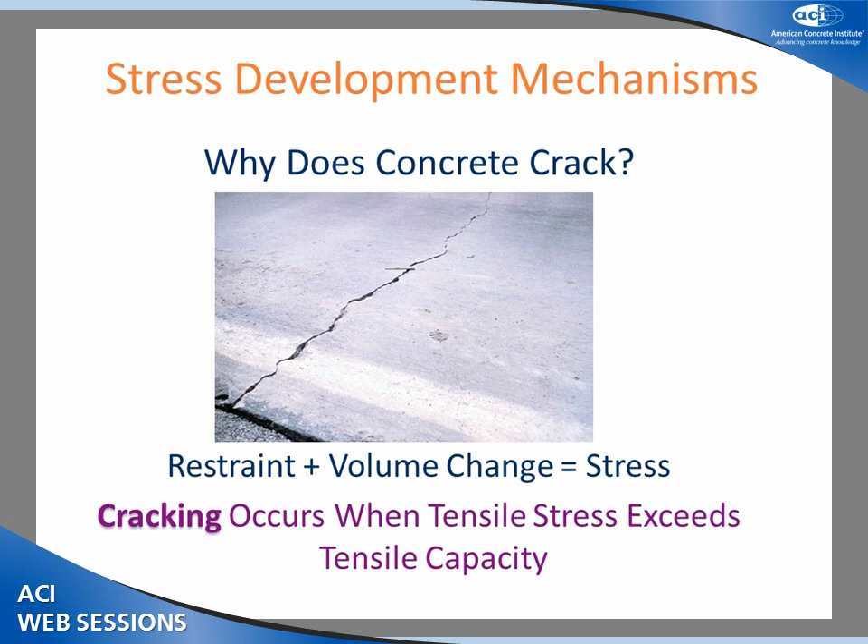Well, when you place concrete in a restrained condition, such as a bridge deck or a slab on grade, you get restraint from either the base, in the case of a slab, or a girder in the case of a bridge deck. So when you have that restraint and then you have these volume changes that occur naturally, you get stress development. When that tensile stress exceeds the tensile capacity, then you have cracking occur.

So why do we have early age volume changes? Well, it can happen for a couple of reasons. One is thermal effects - something changes temperature, it wants to expand. When it heats up, it wants to shrink when it cools down. At early ages, that's primarily going to be heat of hydration, and that's going to be a function of the coefficient of thermal expansion, so different concrete proportions are going to have different CTEs.

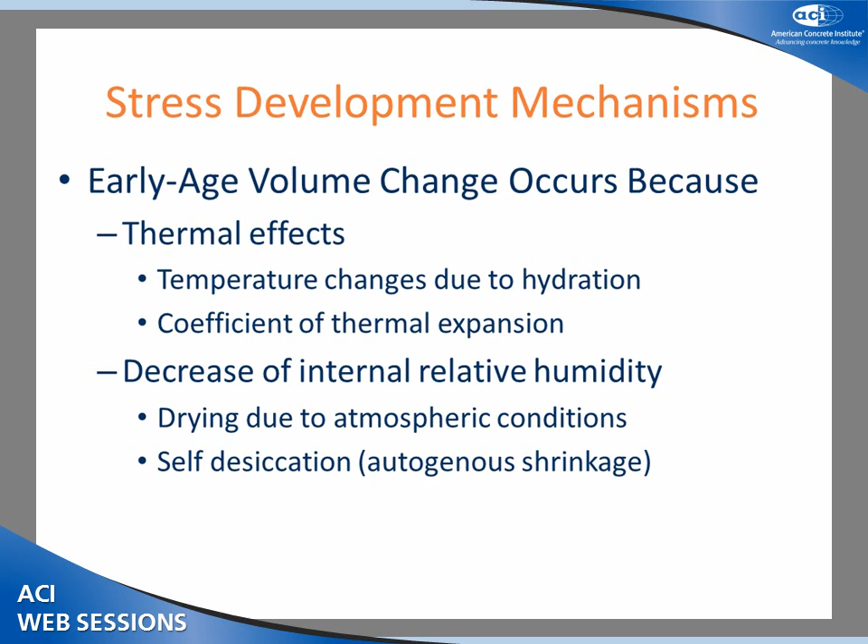In addition, you can also have a decrease of internal relative humidity. One of these we're real familiar with is drying shrinkage, which is moisture leaving the concrete, going into the atmosphere. But then you can also get decreased internal relative humidity due to self-desiccation, which is the consumption of water by the continuing cement hydration. And that's going to lead to autogenous shrinkage, or one of the reasons why we get autogenous shrinkage.

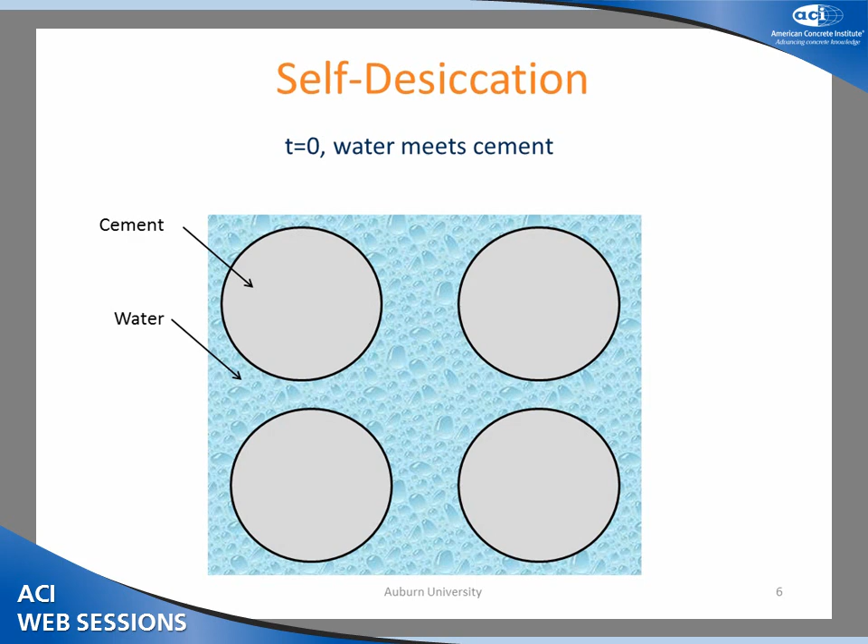So a closer examination of self-desiccation here. Here's a simplified cement water model - you have your cement, perfectly spherical cement grains, which isn't possible, but it makes a pretty picture. So we have our cement and water. This is T equals 0, cement meets water. And we jump forward in time to initial set. At initial set, we have hydration products that are bumped into one another now - you're starting to get a rigid skeleton forming.

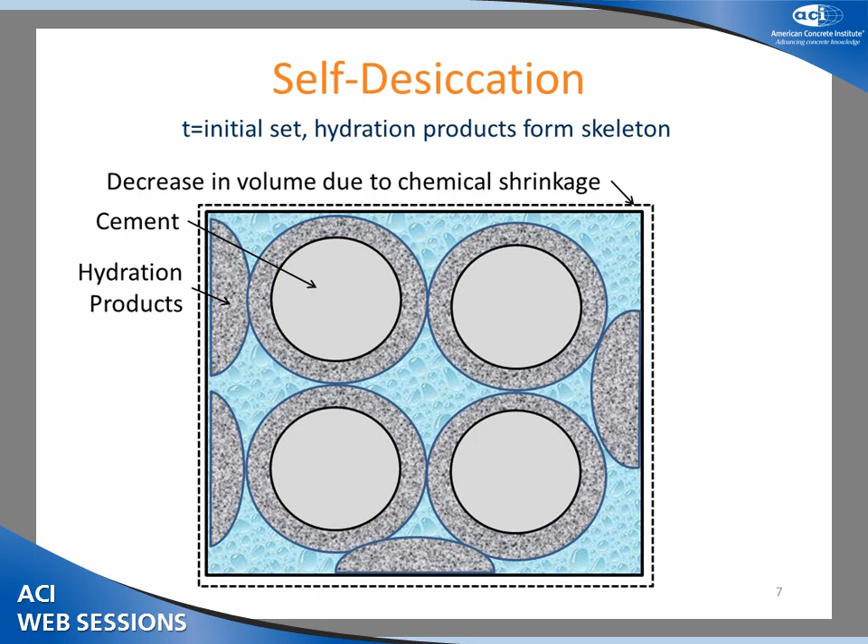Since we have chemical shrinkage, which is about 7%, the hydration products are smaller than the initial grain of cement, and so you get a decrease in volume due to this chemical shrinkage. This is imperceptible before set because there's no stress—these are just cement particles floating around in solution, so there's no stress generation because there's no rigid skeleton yet. What you get is just an imperceptible, almost settling of the slab, and nobody really cares about this shrinkage.

But what we start to care about is later in the cement hydration, a good time after set, we have a lot of hydration products bumping into one another. We continue to have this chemical shrinkage, but since we have this rigid skeleton, we can't just settle a little bit. So what we get is the formation of capillary pores, and this chemical shrinkage causes these vapor-filled pores.

As the cement continues to hydrate, it starts consuming this water out of these pores. So you get a similar effect to drying shrinkage, except with drying shrinkage the water goes into the atmosphere—now it's being consumed by the cement, so this happens in a completely sealed system. We're going to have an additional decrease in volume due to capillary stress. These pores are drying out, we get capillary stresses, and we get this additional shrinkage due to capillary wall stresses.

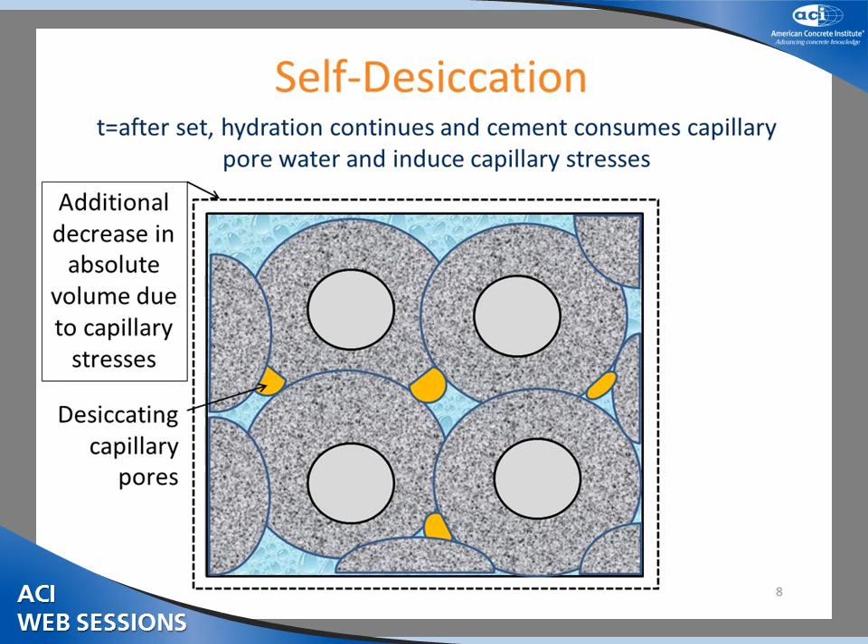Now, with the introduction of some internal curing media—in this case a pre-wetted lightweight aggregate—you get moisture movement from the lightweight aggregate into the hydrating cement paste. This prevents or reduces these capillary stresses by keeping those capillaries full of water or vapor, and so the shrinkage is reduced by limiting these capillary stresses. We found that water can move about 0.12 inches.

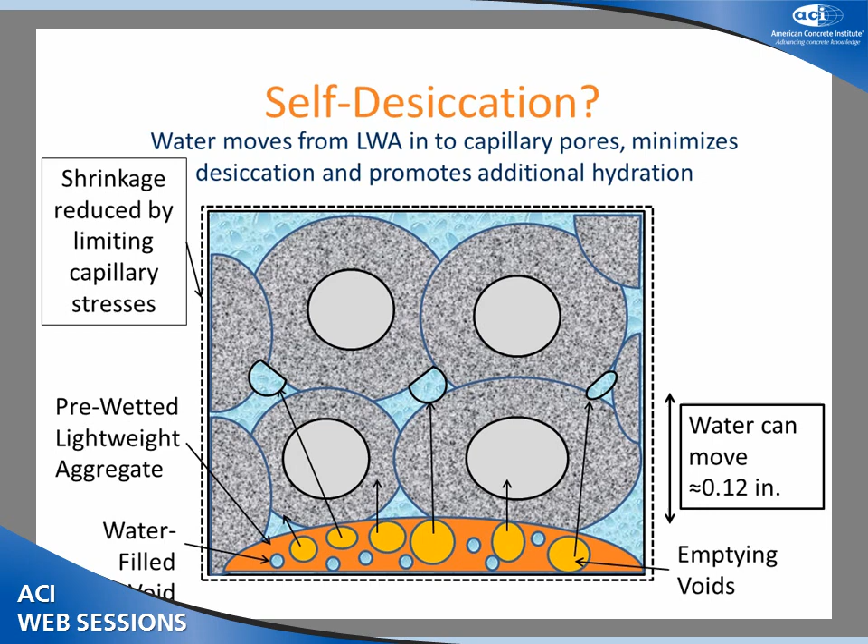In addition to this reduction in capillary stress, we're also keeping these cement grains moist, and by doing so we're increasing their degree of hydration, because when you get pockets of desiccation around the cement grain, it doesn't hydrate as well. So by keeping a good high internal relative humidity, you get a higher degree of hydration.

So why use lightweight aggregate? When you batch it in the pre-wetted state, lightweight aggregate has all this internal water, and this internal water promotes additional hydration, more internal curing. These saturated or pre-wetted lightweight aggregates may alleviate some of these capillary stresses, reducing autogenous shrinkage by keeping those capillaries full of water.

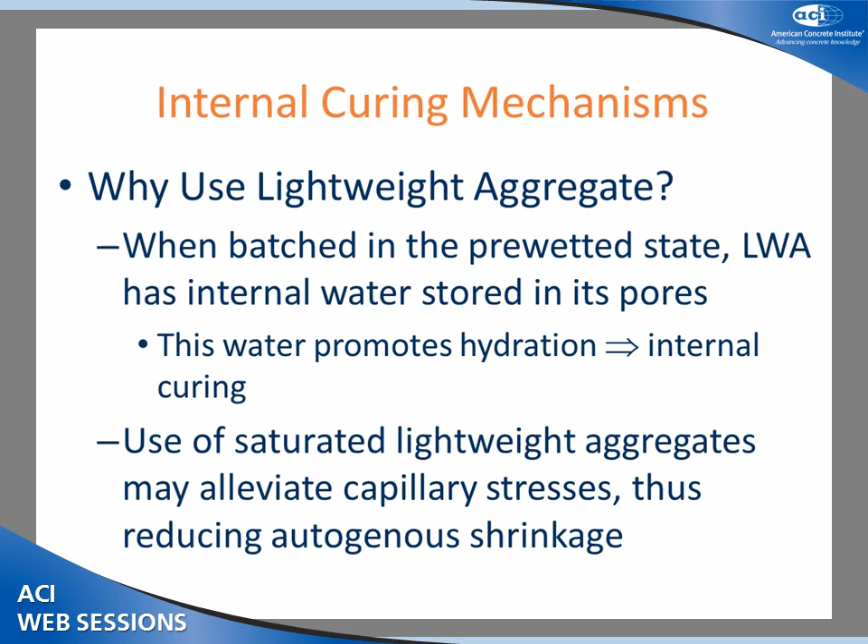Let's look at the testing equipment. We measured the stress development using our rigid cracking frame. Essentially you have this large concrete dog bone—its cross-section is 6 by 6. If you stand that puppy up, it stands about as tall as me, so about 6 foot tall, with dog bone gauge length and everything.

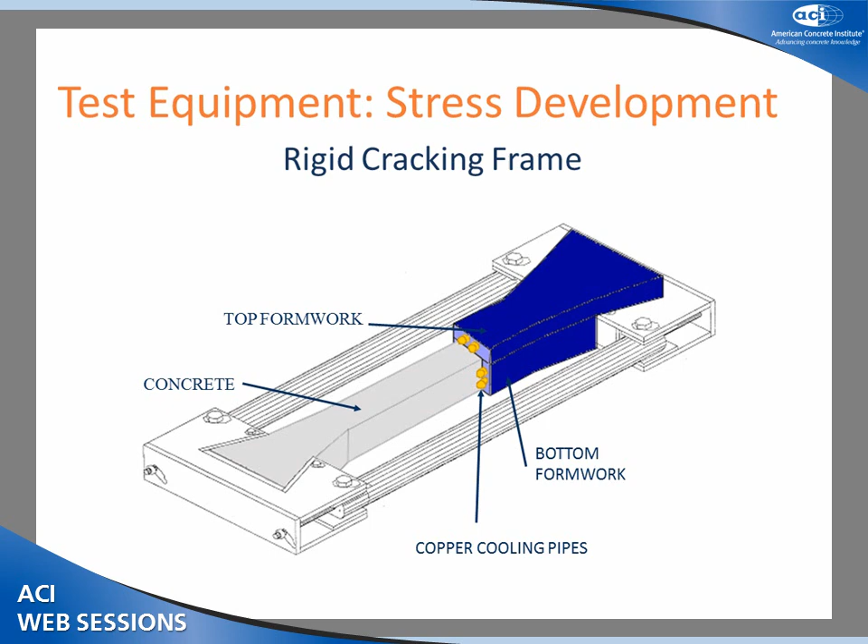So we cast it in sealed formwork, and inside that formwork we have copper cooling pipes—you can see it there. You have some copper cooling pipes, and that allows us to control the temperature of the sample, so we can run it through whatever temperature regime we'd like. As it undergoes these volume changes, it's restrained by those large 4-inch diameter steel bars.

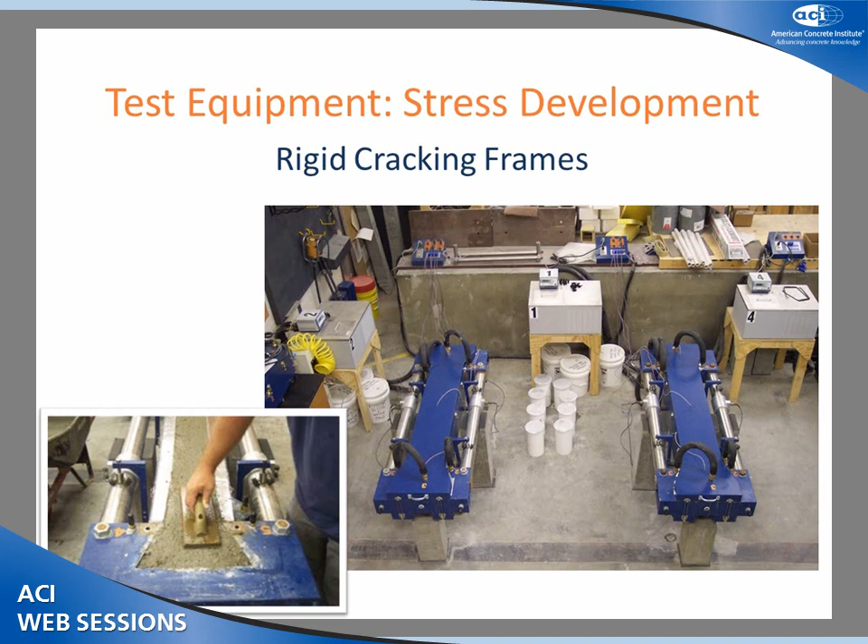And so here they are in real life. You can see the hoses there that circulate our temperature control fluid, which is water and ethylene glycol. You can see somebody finishing it there. Like I said before, it's perfectly sealed, so there's no moisture movement in this system, and then we can control its temperature with those large temperature control baths. That's how we measure the stress development in these rigid cracking frames.

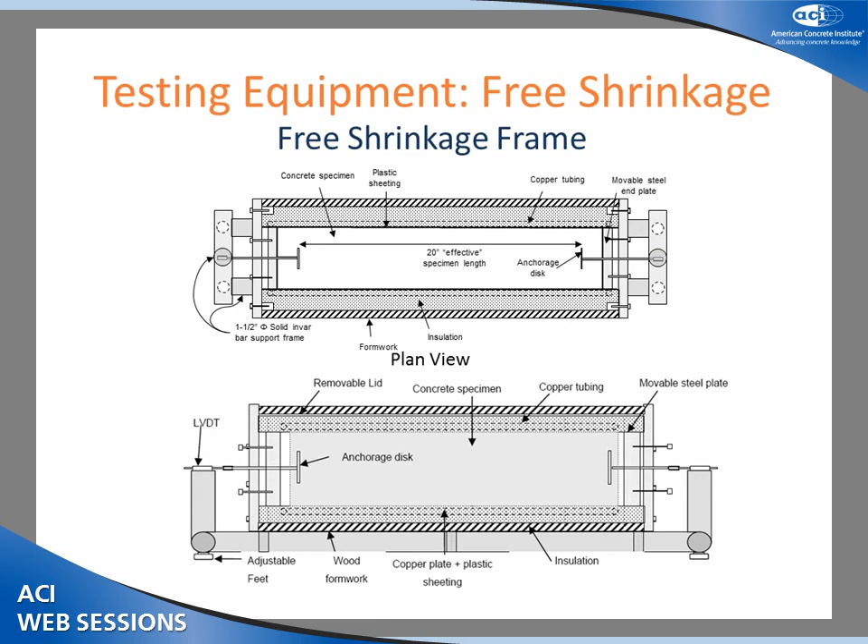To measure free shrinkage in concrete, we used free shrinkage frames developed by Byard. We borrowed his design and built them at Auburn. We have a 6 by 6 cross-section box, place 2 layers of plastic with oil in between, place the concrete, attach LVDTs embedded into the sample, then cover and seal it.

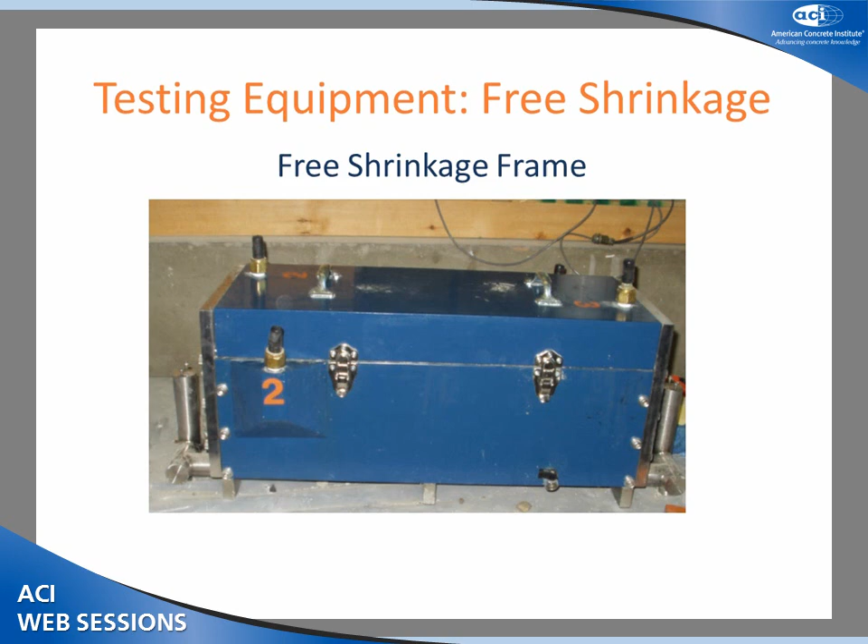It's also temperature controlled, so we can run it at the same temperature regime as the rigid cracking frame for stress development. This allows us to get the stress development and the unrestrained movement of the sample.

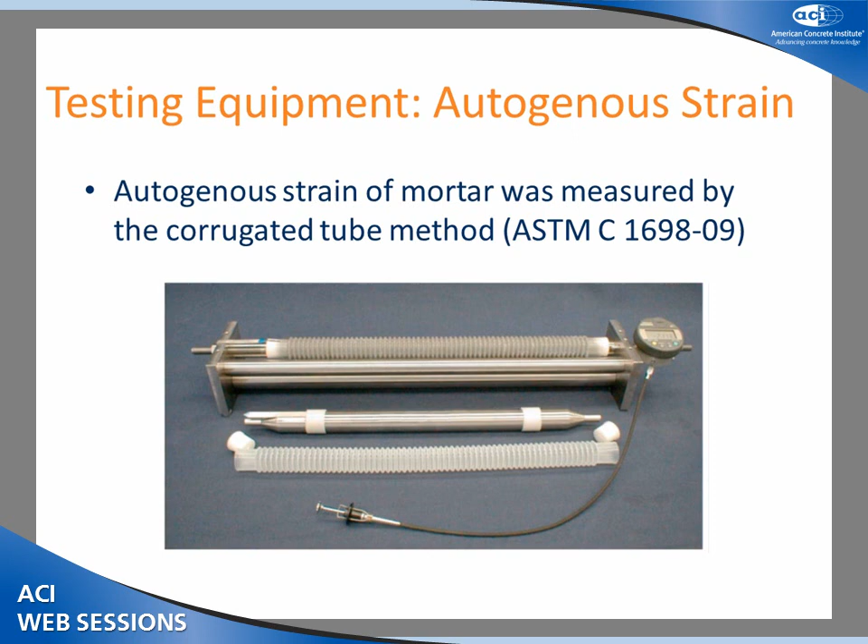For the free strain of the mortar, we measure that with the corrugated tube method, ASTM C1698. That's how we captured the free strain of the mortar.

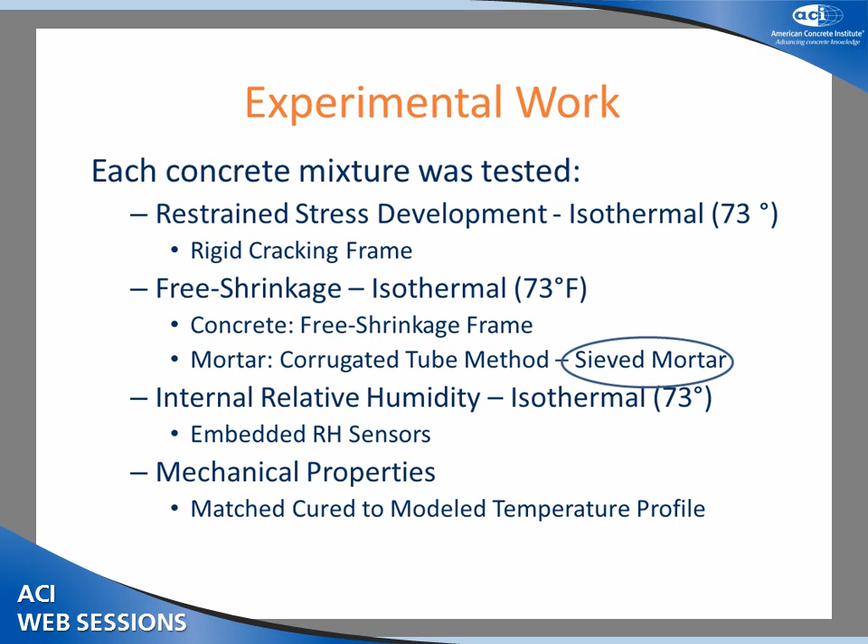We just sieved it, and we measured internal relative humidity with embedded relative humidity sensors, also held at isothermal condition. We measured mechanical properties too, but I won't present that data since there's simply not enough time in this 20-minute presentation.

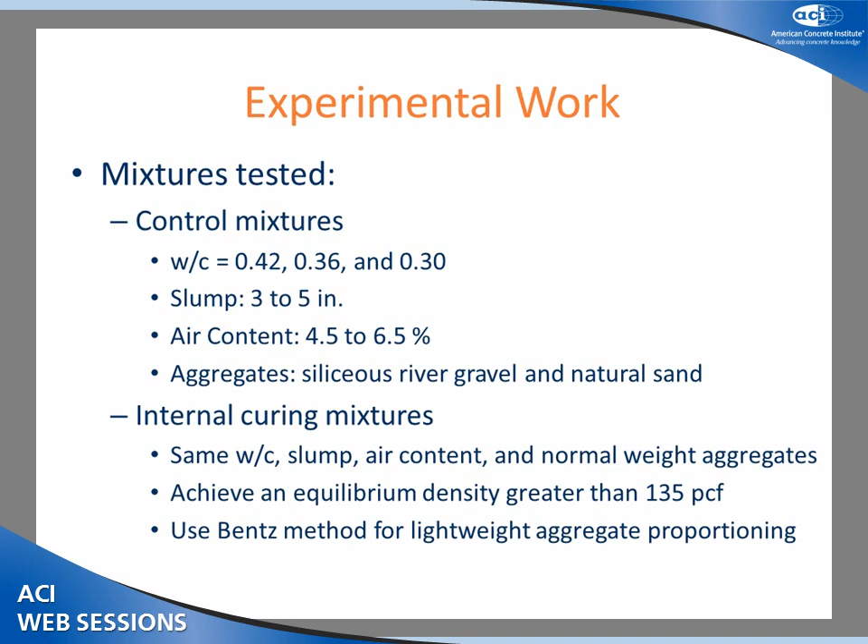The Bentz method simply calculates the chemical shrinkage volume and then supplies an equal volume of internal curing water. For our 0.42 mixtures, because of their proportions, if we used the Bentz method we would be less than 135 pounds per cubic foot. So for the 0.42 mixture, we simply used the maximum replacement of fine aggregate with lightweight aggregate that would give us a calculated equilibrium density of 135 pounds per cubic foot.

This did something interesting: the 3 lightweight aggregate sources we used—shale, clay, and slate—each had different absorption capacities and specific gravities, yet they all weighed 135 pounds per cubic foot calculated equilibrium density. Due to their different absorption capacities, they provided 3 levels of internal curing.

Shale, clay, and slate: the shale provided the most internal curing water, the slate provided the lower level. You can see our internal curing water provided from each of them, in pounds per cubic yard. Something else to point out: with all these mixtures, the paste volume was the same, the coarse aggregate volume was the same, and the total fine aggregate volume was the same. So fractionally, all these mixtures are the same—we just switched out a little normal weight with a little lightweight.

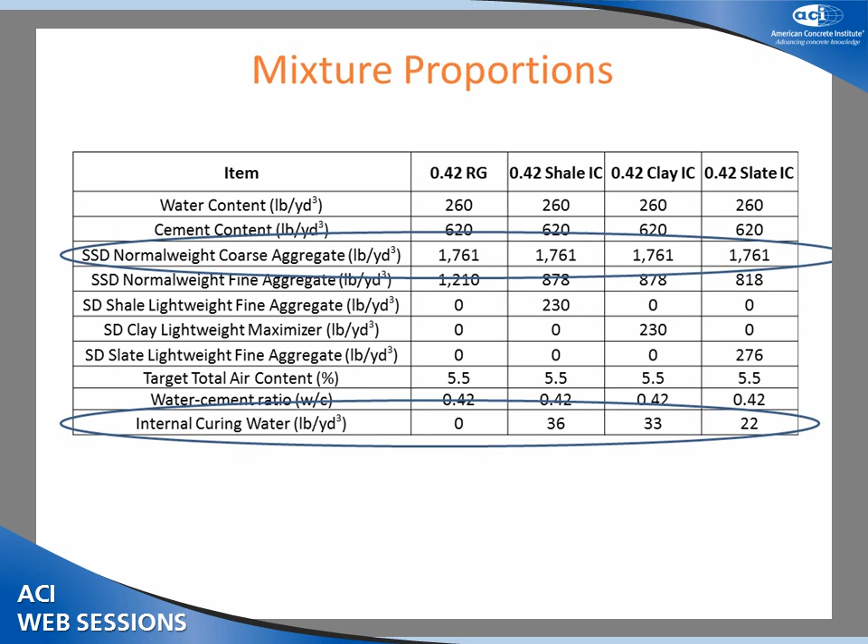Once again, all these mixtures—the 0.42, 0.36, 0.30—have the same coarse aggregate volume, the same paste volume, and the same fine aggregate volume. So when we got to a lower water-to-cement ratio, essentially all we did was keep the same paste volume and change the proportion of cement and water. So from a stress development point of view, their volume fractions are identical.

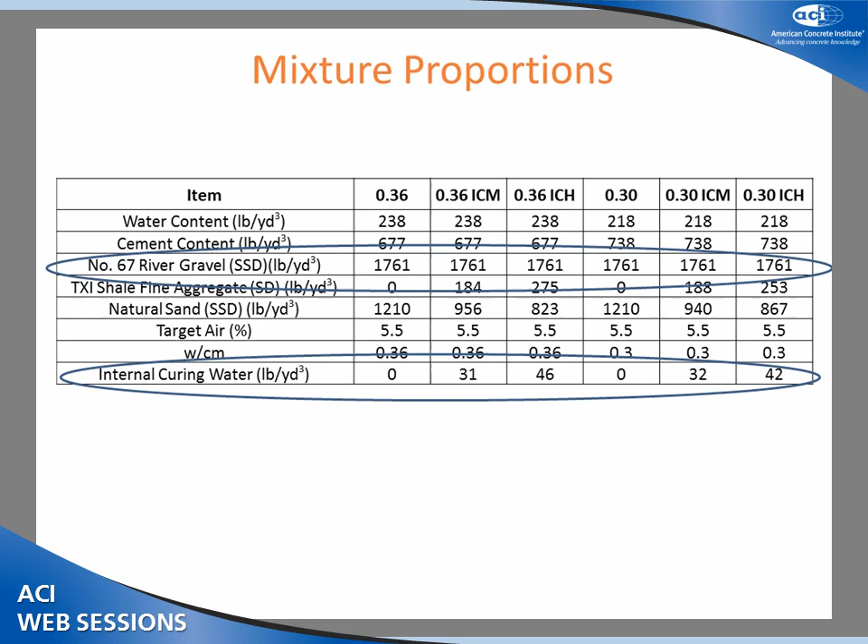As you get a decreased water-cement ratio, you start getting smaller capillary pores, and you get lower permeability. That's one of the reasons we like low water-cement ratio mixtures, because of their low permeability. So you have smaller capillary pores, you get lower permeability. But what you also get is, those smaller capillary pores, when they dry out and desiccate, create greater capillary stresses. So those small pores are great for permeability, but when they dry out, they produce more stress from a capillary stress point of view.

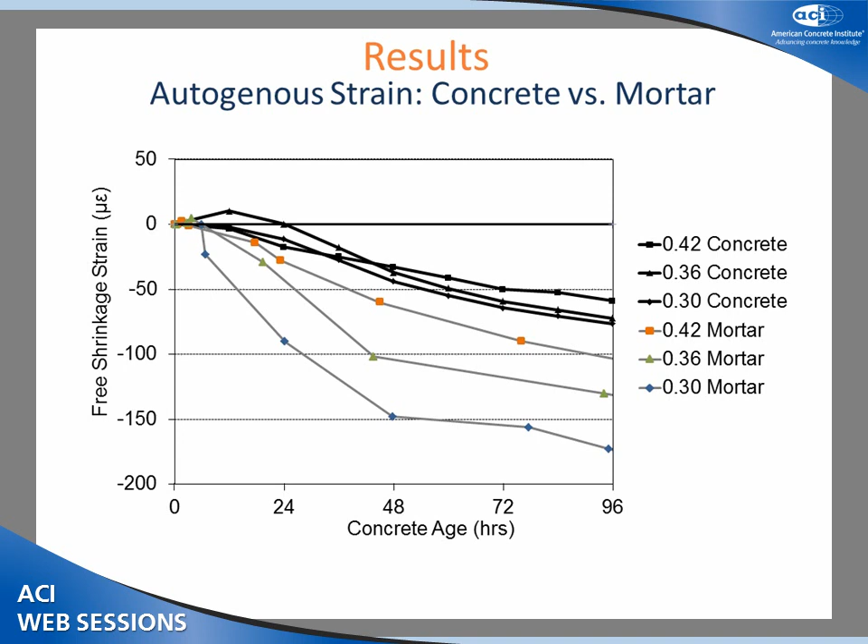And that was kind of just the nature of the test that we did when we pulled out some of those 3/8 inch particles.

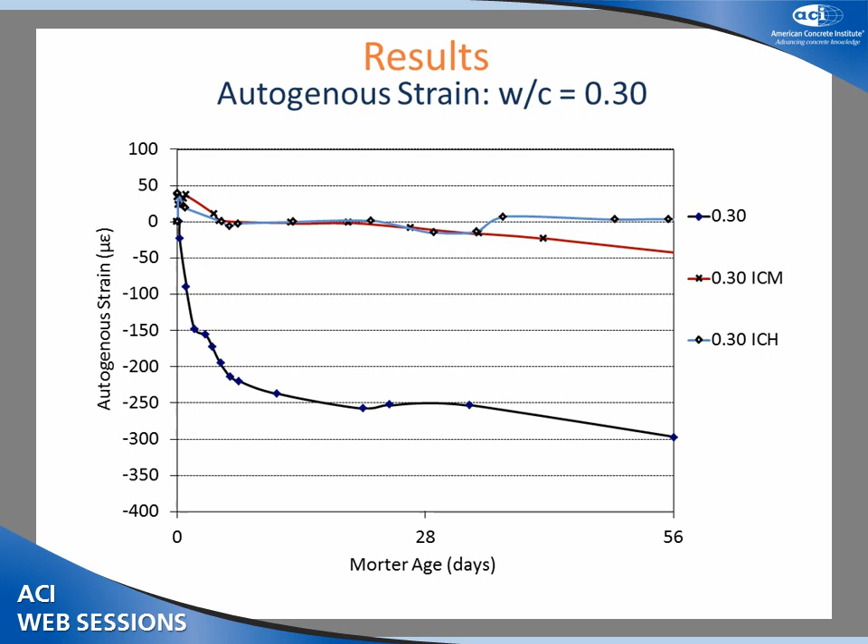Now we're getting into the stress development. So far we've been looking at the driving force, essentially the volume change. Now we're looking at the stress development.

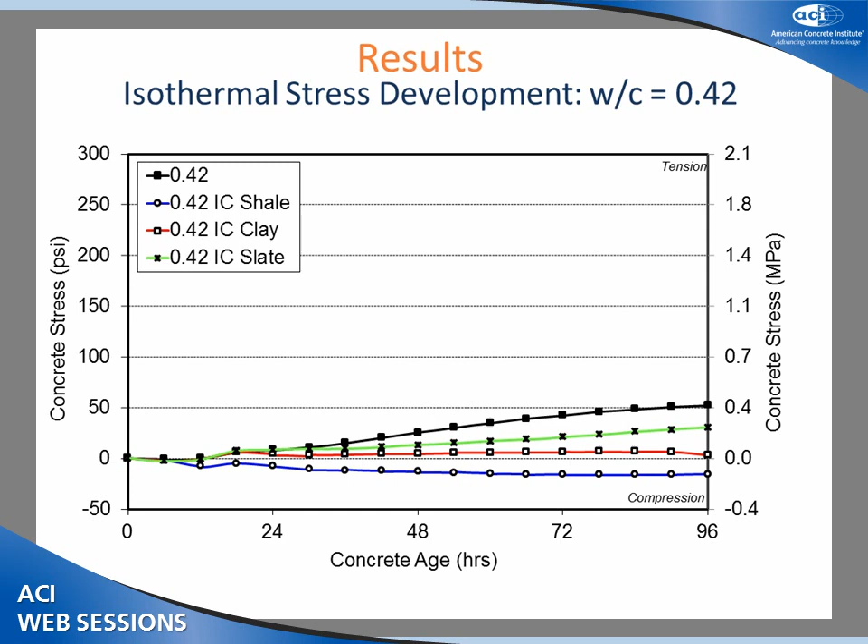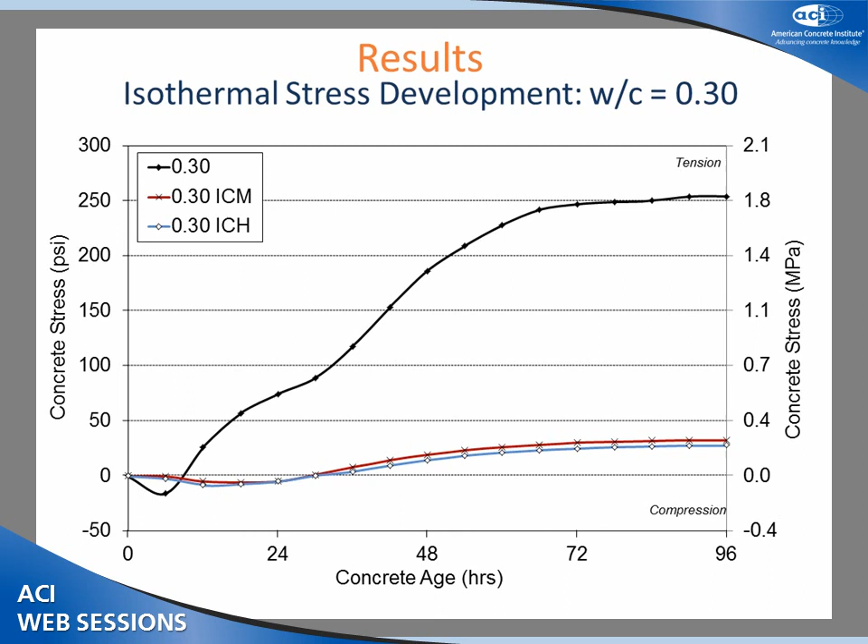and our ICH, our high level of internal curing, mitigated almost all of that autogenous stress development. Here we have 0.30, 250 psi in 4 days, completely isothermal, which is kind of a big problem. Then our ICM and ICH mitigated the stress development equally well there. So they're about 25 psi.

But if we added more, it would also plateau. You start getting diminishing returns after you get this stress reduced, then you reach that plateau like you see in the 0.36 and 0.30.

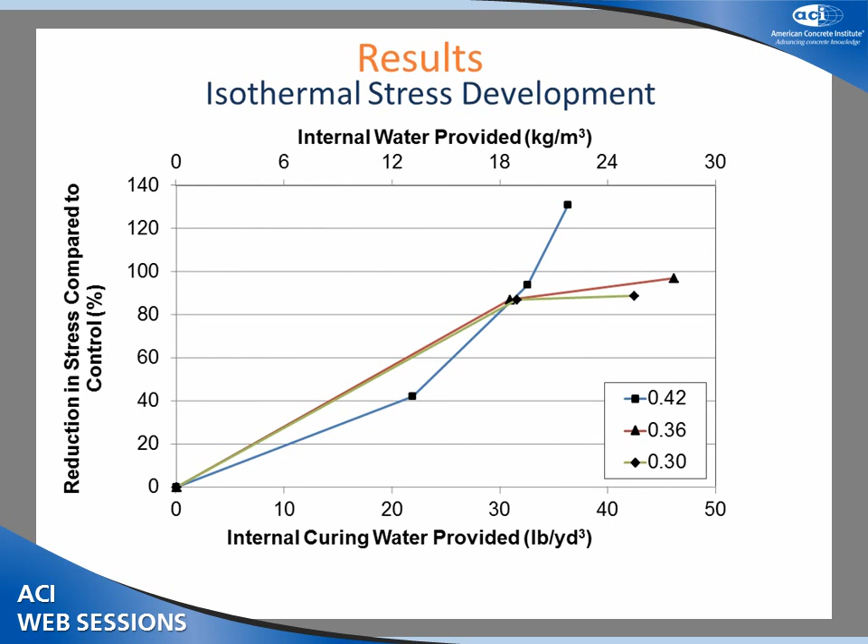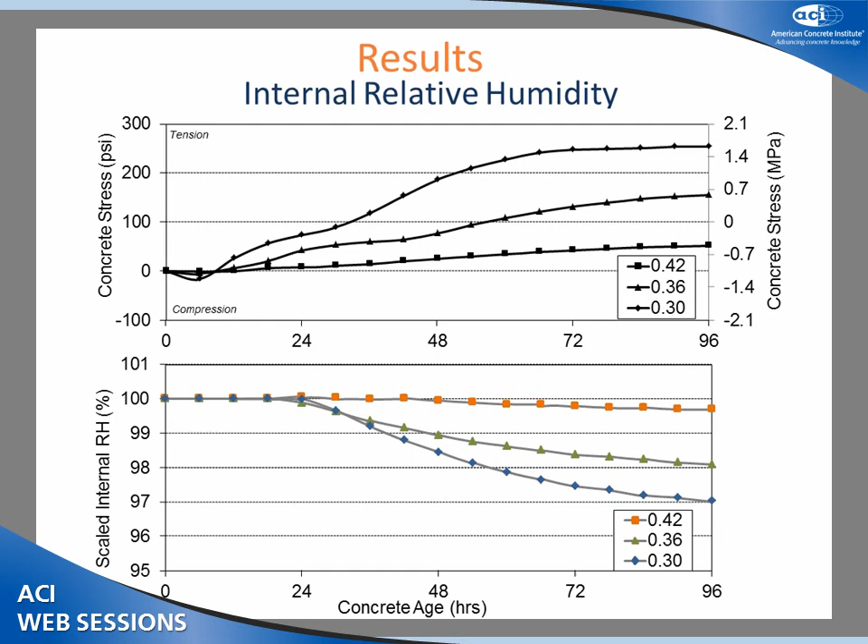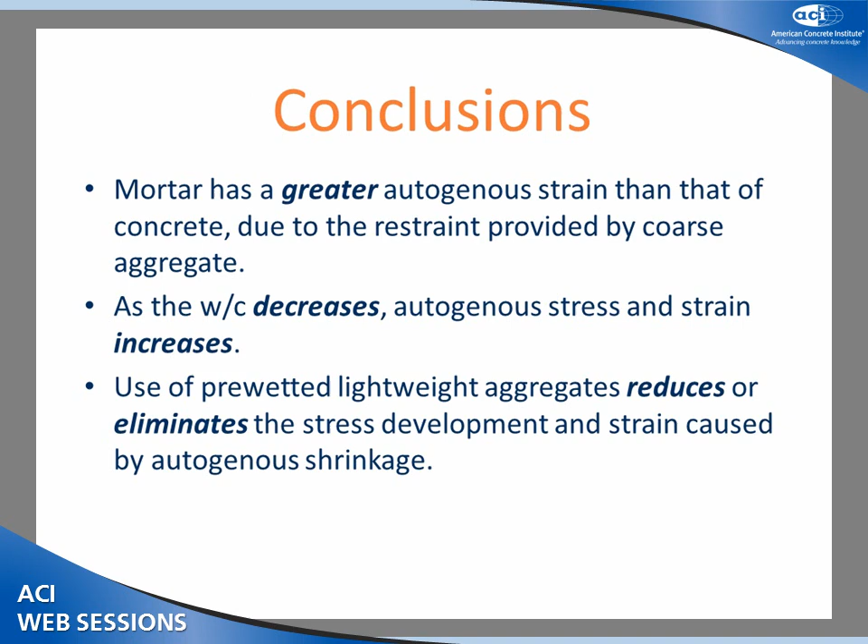Let's look at the conclusions here. Mortar has a greater autogenous strain than concrete due to the restraint provided by the coarse aggregate. As the water-cement ratio decreases, autogenous stress and strain increase, due to the smaller pores. The use of pre-wetted lightweight aggregate reduces or eliminates the stress development and strain caused by autogenous shrinkage.